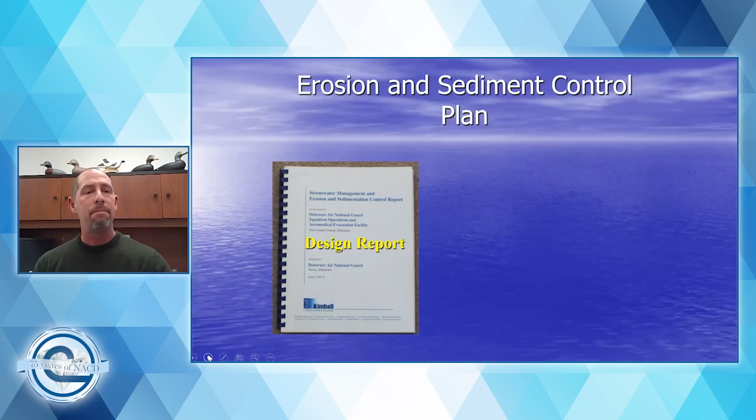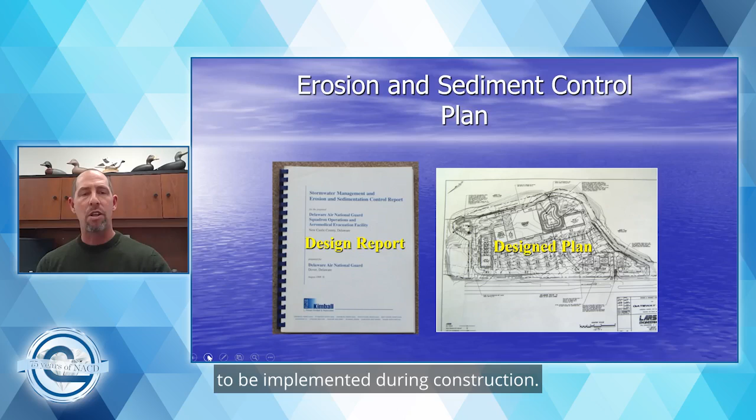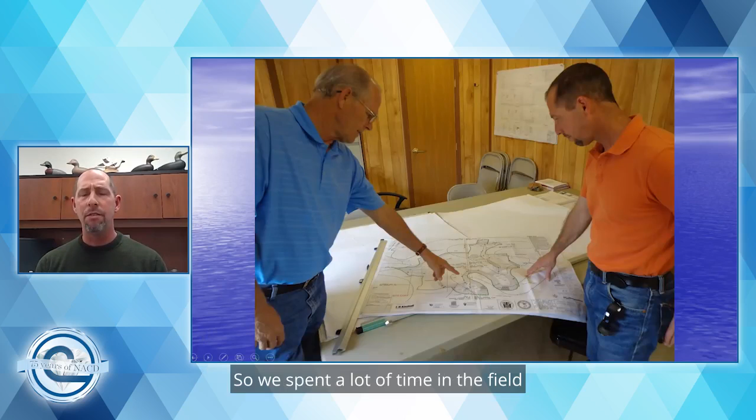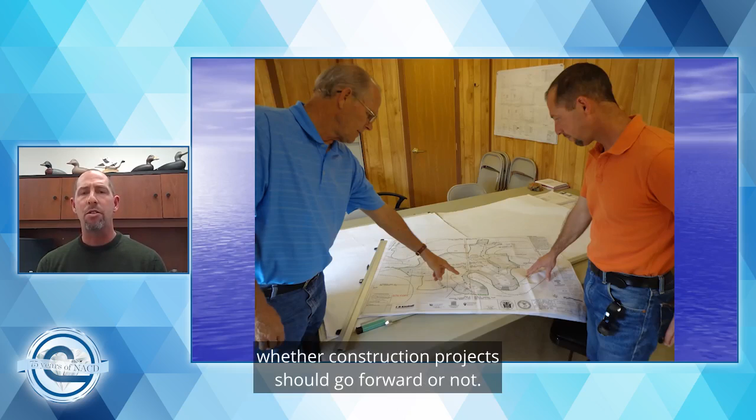And then we have our actual soil erosion plan, which will indicate the measures to be implemented during construction. This is a prior presentation I put together showing something of a virtual inspection. So we spend a lot of time in the field meeting with the responsible parties on site, discussing their projects. We're not a land use authority, so we don't get to determine whether a construction project should go forward or not. We just look to see that it's done in the most responsible fashion.

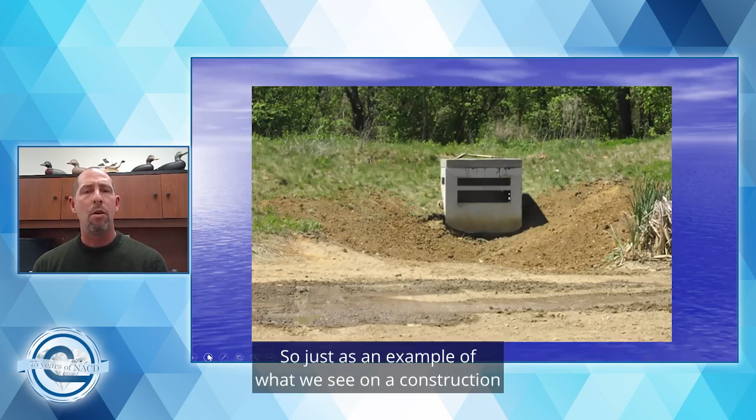As an example of what we see on the construction end, we will see these new structures placed early on in construction. We see them as they go in and during construction, so we know what we're looking for. Same thing with the riprap channel. If you have an idea how it started and you stumble upon something similar 15 years later, you can identify: is this working right or not? Is there an issue here?

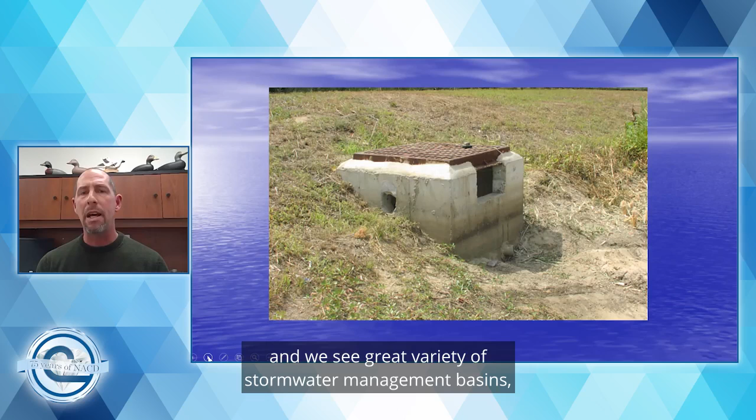Just another structure. So, we're on these job sites on a near daily basis, and we see a great variety of stormwater management basins, infiltration basins, retention basins, wet ponds, dry ponds, ponds with low flow channels, sediment basins. So we get to see quite a variety.

But our goal here is to reduce erosion through proper stabilization. Short term, we're looking to eliminate this or minimize this type of sedimentation during the construction. Long term, those basin outfalls, they can become an erosion problem that lasts for 5, 10, 15, 20 years. Once they're installed, very few people actually ever go back to take a look at them. And if there's a problem there, it's not going to be discovered without some sort of inspection.

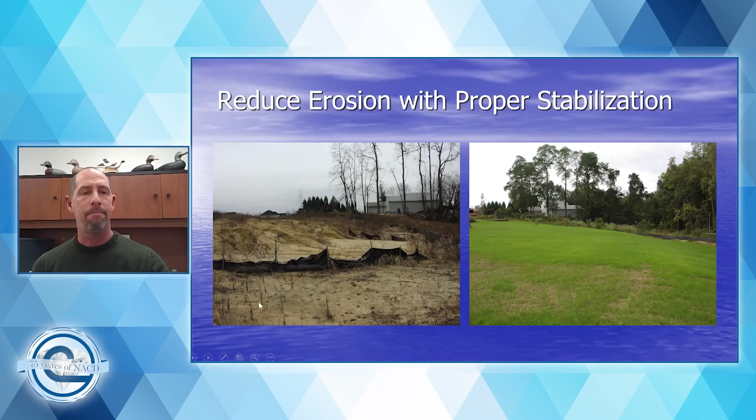So with all that being said, what is MS4? It's Municipal Separate Storm Sewer System, and that incorporates a municipality's storm sewer inlets, their basins, their culverts, any other kind of outfalls, and any other stormwater conveyance, roadside ditches, that sort of thing. The NPDES permit program, created in 1972 under the EPA's Clean Water Act, was put together to help address water pollution by regulating point sources as they discharge pollutants to the waters of the United States.

Many states receive a status of delegated, which assigns their compliance responsibility to the state. Probably 2/3 of the states in the nation have this current delegated status. In New Jersey, this delegated responsibility rests with the New Jersey Department of Environmental Protection. So the municipalities in the state are required to have a stormwater management plan and a stormwater ordinance, and file an annual report with the state of New Jersey to verify that their MS4 is in compliance.

Some examples of MS4 compliance requirements are to ensure that there's adequate post-construction operation and maintenance of stormwater management facilities owned or operated by the municipality. In New Jersey, some municipalities will take ownership of stormwater basins after construction has been completed. And in other cases, those stormwater basins remain the responsibility of a homeowners association, and in some cases, actually the responsibility of the property to which the basin is attached. So that might be just one homeowner, might be charged ultimately with maintaining the basin for the entire subdivision.

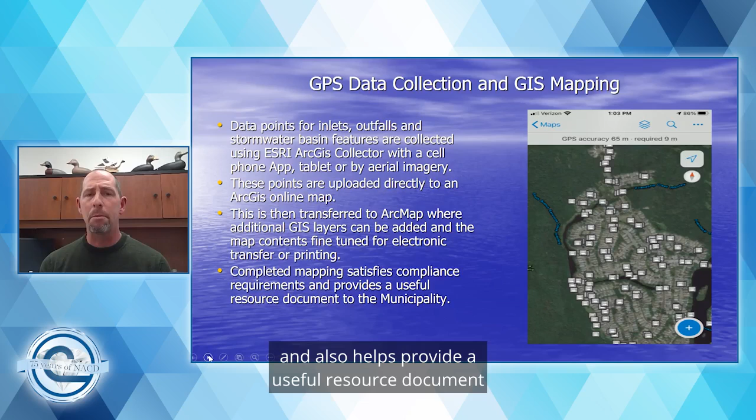So the data points for inlets, outfalls, and stormwater basin features are collected using an Esri ArcGIS Collector with a cell phone. Typically, I'll carry a cell phone, but it can be done with a tablet. And in some cases, you can collect the points via aerial imagery. These points are then uploaded directly to an ArcGIS Online map and then transferred to ArcMap, where additional GIS layers such as streams, streets, that sort of thing can be added, and then the maps are fine-tuned for electronic transfer or printing. Completed mapping satisfies the compliance requirements and also helps provide a useful resource document to the municipality.

So our basin inspection program actually kicked off before we were ready to go with GPS and GIS, because we already had the inspection component. We began inspecting stormwater management facilities through these shared services agreements in 2018 and carried into 2019 and 2020. So in 2019, we inspected upwards of 500 basins. This year, we inspected about 250 basins, but we also provided mapping services to a couple of townships. Some of those maps included up to 1,000 points.

So these agreements have provided an additional revenue stream, which is helpful. We have to be, like I said, a little bit entrepreneurial, so we have to look for other ways that we can maintain our finances. We also identified deficiencies that can be corrected and provide for improved stormwater management and water quality. As part of our program, we're providing an inspection report to the township or to the individual private entity that requested the inspection so that they can move forward with correcting any of the deficiencies that were identified.

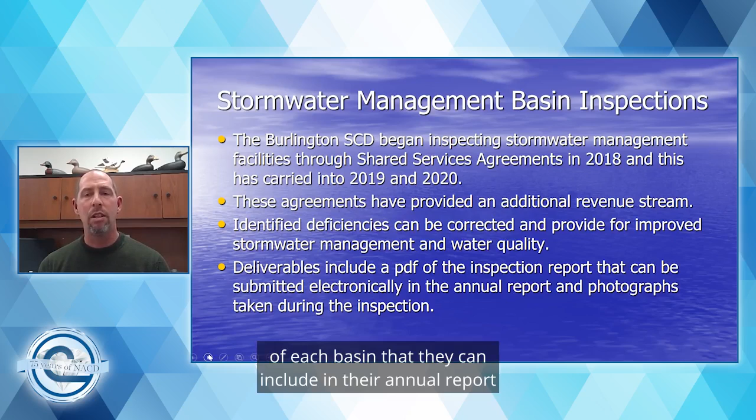During my inspections, I will generally carry a shovel with me, which helps me maintain balance in some of the wetter, more naturalized basins. But if I come across a clogged outflow structure that can be easily cleared because there's a red cup in there or a bottle, I'm happy to do so, and that gets the basin functioning the way it should. Our deliverables also include a PDF of the inspection report and generally 5 to 10 photographs of each basin that they can include in their annual report and use for their own purposes.

So this is an actual copy of our inspection report. Now this I keep on a tablet, but I don't carry the tablet with me into the basins, as I'm generally having to get through some rougher terrain. There's a lot of brush in some cases. Some of these basins are naturalized to the extent that the trees in there are 20 inches in diameter or so, with a lot of briars and brush that get in the way. So I don't generally carry this on me, but I do carry the cell phone for taking a lot of photographs. So it helps with my observations.

So we're looking at pre-treatments. We're looking to determine, is there standing water, floatables, emergent vegetation, which could be a sign that something is not working properly. Obviously, erosion, channelization. We're looking for animal burrows that might be weakening the basin berm. Sinkholes, low flow channels that are damaged or need cleaning. Basin liners, aerators in your wet ponds to see if they're functioning. We're looking at the vegetative stabilization for the basin bottom and the basin side slopes.

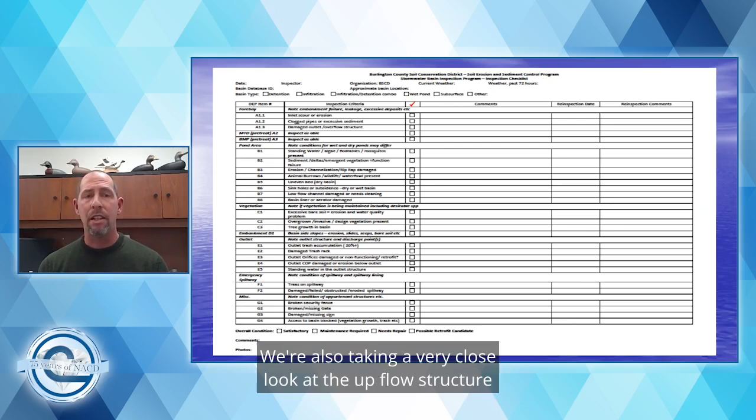We're going to observe and record here what type of vegetation is in the basin. Are there trees in the basin? Should there be trees in the basin? Was that part of the design? We're also taking a very close look at the outflow structure or the outlet structure to see if there's a trash rack, to see if there's any damage to the structure, to see if there's water standing in the structure, see if it's blocked.

We are also looking at the spillway, the emergency spillway, which is a typical part of most embankment basins, to see if that's obstructed or damaged. And in some cases, many basins will have fences to keep out people. So we're looking to see if those fences are damaged. Are there gates? Is there damage to the gate? So we're looking at all of those facets, and then anything else that stands out to us.

And at the very bottom, we will identify whether the basin is satisfactory, whether there's maintenance required, whether there's some needed repair, and if it's a possible retrofit. And we attach our comments and our photographs.

Okay, Eric, so at this point, I'm going to look to try to splice in that virtual inspection.

All right, so this is a little video I put together using a staff person's drone here at the district, just to kind of provide some idea of what a typical basin inspection would look like. We did this recently, so there is some snow on the ground, but we start doing inspections once the agreements are signed, and sometimes that is as early as March. Some townships wait a little bit, and we don't get started till almost September, which really shortens our timeline.

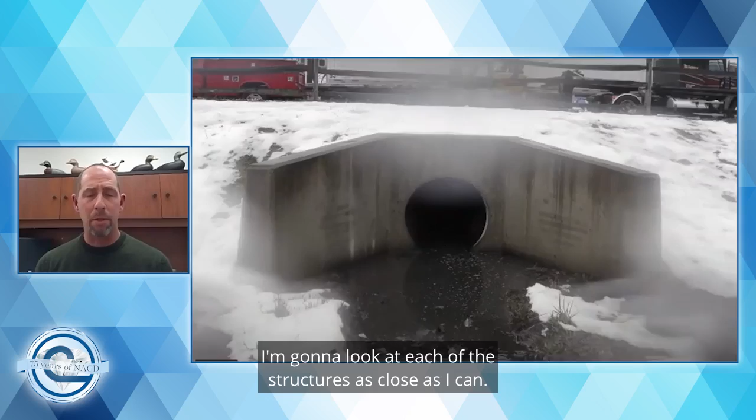So first thing I'm doing is I'm entering the basin. If there's a fence, that's what I'm doing. I'm going through the fence and the gate, and I'm going to take pictures of each of the structures. I'm going to look at each of the structures as close as I can. Here you see some floatables that have come out of the basin outflow structure.

Now, this was an easy basin to navigate because it's relatively flat. There's no vegetation. There's nothing I really have to get through. I do have boots on in case I get in a wetter area. So I just make my way from structure to structure, kind of making some mental notes along the way, taking photographs of anything that stands out. So I'm walking over to this basin inflow structure over on this side of the basin.

In some cases, you'll see obstructions in there. There could be a grate that's holding in leaves, and that holds water in the pipe, perhaps under the parking lot. In this case, that's not there. So that's relatively unobstructed. Now we're going to go over and take a look at the emergency spillway.

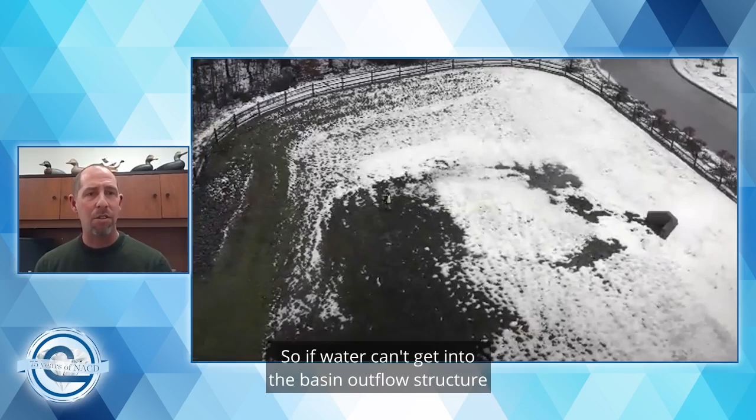So if water can't get into the basin outflow structure, or there's a larger storm event, basins are typically equipped with an emergency spillway, and that spillway needs to be kept clear so that water can flow unimpeded through and over it. So in this case, that's the gray material. It's riprap. It's usually larger rock. All emergency spillways are not stabilized or armored in that fashion, but they can be. And that's the downstream area. That emergency spillway is in pretty good shape.

No obstructions were noted. And along the way here, if we're being engaged by the township to take our GPS points, I'm actually stopping to identify the location of the basin, grab my points for that using my cell phone. Also the basin outflow structure, which I'm walking toward now. There I am still walking to it.

So there's a trash rack in front of that basin outflow structure. That's the angled metal there on the front. Looks like a grate. And it's very common for plastic bags, leaves, whatever it might be, to kind of get pressed up against those trash racks by the force of the water trying to leave the basin. So it's very key to make sure they're inspected and maintained and kept free.

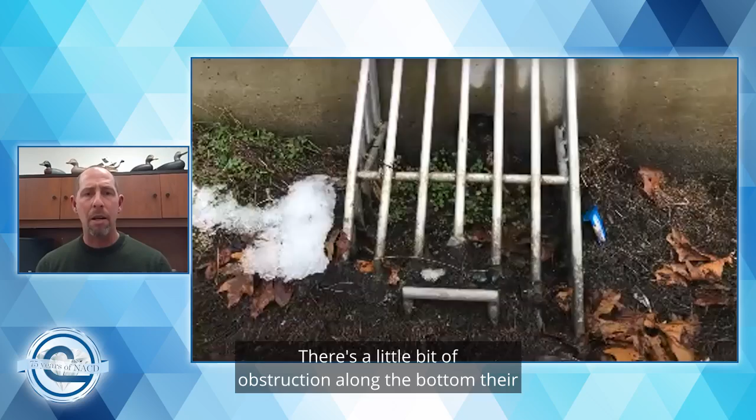There's a little bit of obstruction along the bottom there, not terrible. But if I needed to, I can grab my GPS point while I'm there. So where that's focusing now is the basin outfall area. So now I'm going to leave the basin itself and walk around to get to the basin outfall to make sure that there's no erosion at the basin outfall.

But again, this was an easier one to reach. I tried to find something that would hopefully provide a good, clear example without a lot of brush in the way. And here again, I'm going to take a look at the basin outfall structure to see if there's any impediments at the outfall structure. Sometimes trees will grow up right in front of the pipe, which can artificially hold water back in the basin. And we're going to see a photo of that shortly.

So, as you can see, there is some vegetation growing over it. It's not yet obstructing it, but it is something to be mindful of if you're the owner of that basin. You know, this is a privately owned facility, but we were doing the inspection for the municipality. Some municipalities will pass along a cost to those privately owned basins, and some will take it upon themselves to see that the inspection is done the way they would like to have it done. I'm just grabbing a couple more photos of the downstream area, to document that there's no erosion there.

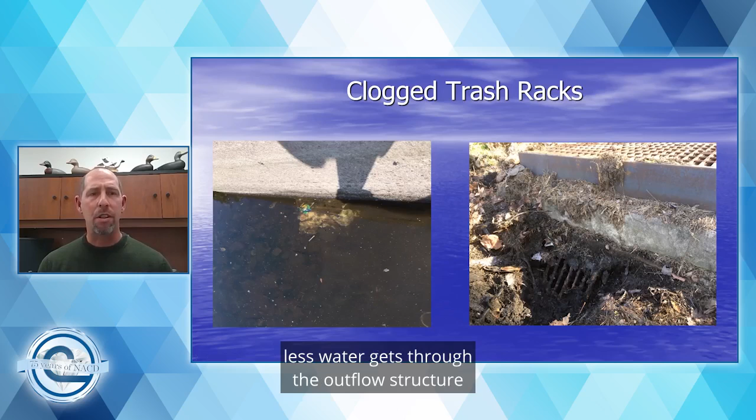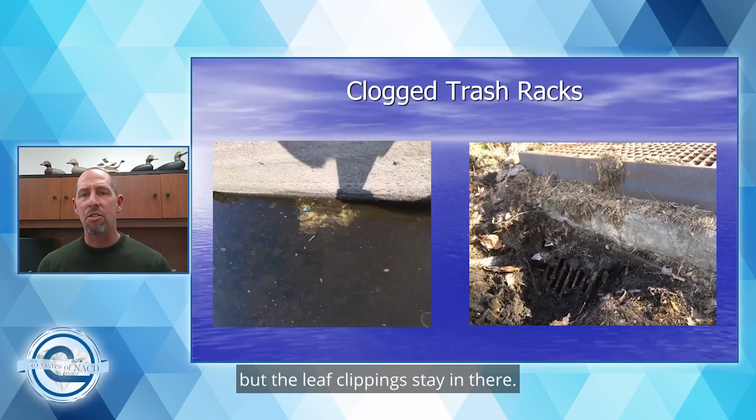This is a different structure here on the right-hand side where I've tried to clear back some of the material. Most of this is organic based. Leaf clippings, that's a big thing. Most of these basins, they get mowed, but the leaf clippings stay in there. Rain comes, they lift up, they float to the basin outflow structure, and now they're clogging up the structure and holding water in the basin.

Same with the leaves. But you can see over on the top here, this is the grate. That grate is open, so the basin will pass stormwater, but not as it's intended to. So it is somewhat impaired.

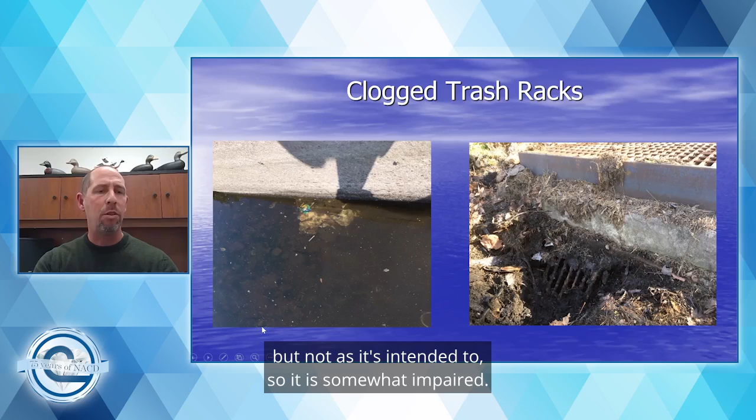Just some more examples of clogged trash racks. Great intentions with these trash racks. And I think there's a real opportunity if someone can come up with a trash rack that does not result in some clogging. This basin here, see, that's basically all algae and vegetative material that's just pressed up against the trash rack. Water level goes down, it dies off, and it's almost like plastic.

Same as over here on the right-hand side. Very little water is passing through that, and you can just see all the algae that's kind of sitting in there, and that's what's really causing a lot of the issue.

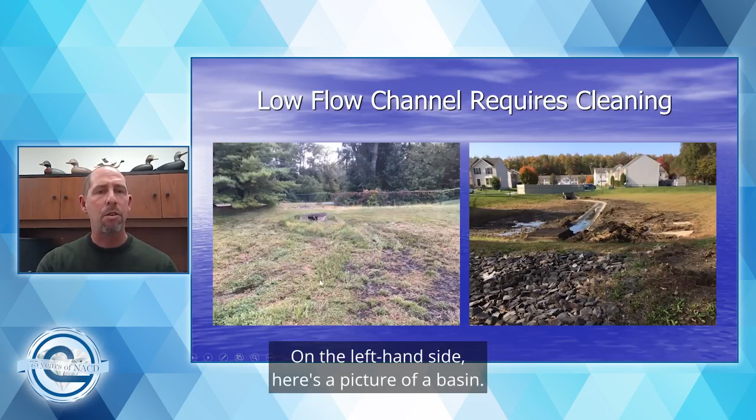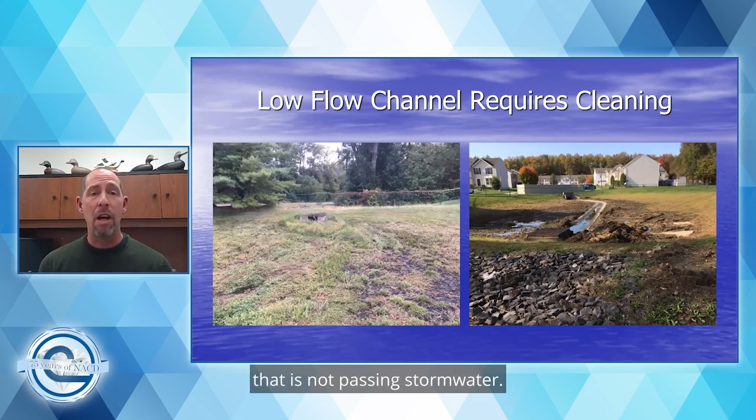Low flow channels that require cleaning. On the left-hand side, here's a picture of a basin. Here's the outflow structure at the very end where that rectangle is. No evidence of a low flow channel. But if you look a little closer at the structure, and if you look at the structure from the inside, so you're standing on top of it, looking into the grate, typically what I will see is an opening in the bottom that is not passing stormwater. That's an indication that there's a clog, also an indication that there could be a low flow channel.

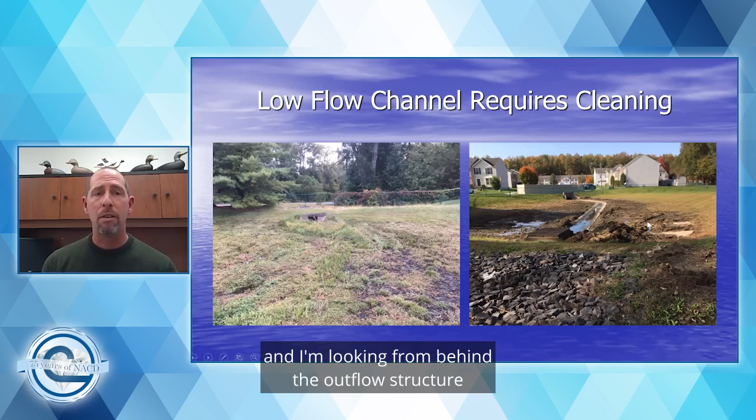So on the right-hand side, you see that same basin, and I'm looking from behind the outflow structure back into the basin after some cleaning has taken place, and you can see the low flow channel is now observable. And eventually, when this work is done, it will pass stormwater much more efficiently. You also see in the foreground that the basin has an emergency spillway.

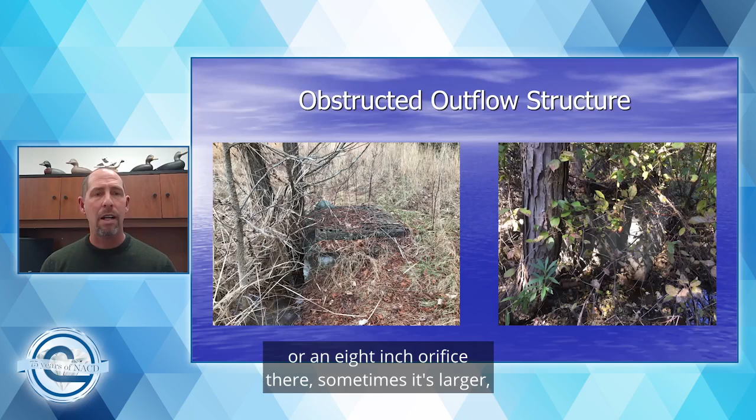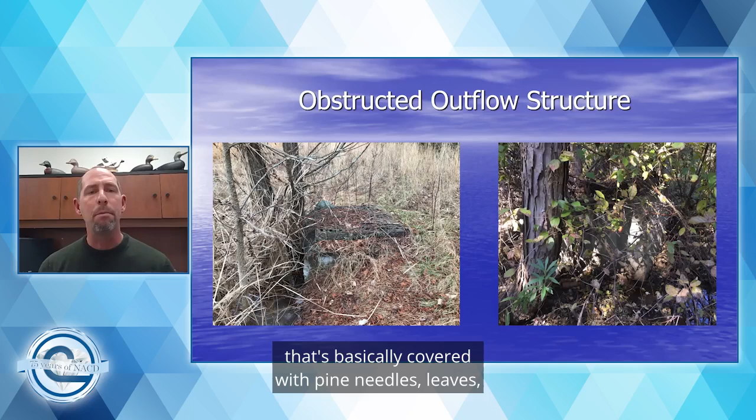So, obstructed outflow structures. So this is how water actually leaves the basin. And on the left-hand side, you can see that there's trees actually pressed up right against the outflow structure. So typically there's a 3 or 5 or an 8-inch orifice there. Sometimes it's larger, but very little water is going to pass through that, given that there's a tree there. Also, you'll see on top there's an inlet grate that's basically covered with pine needles, leaves, tree branches, that sort of thing.

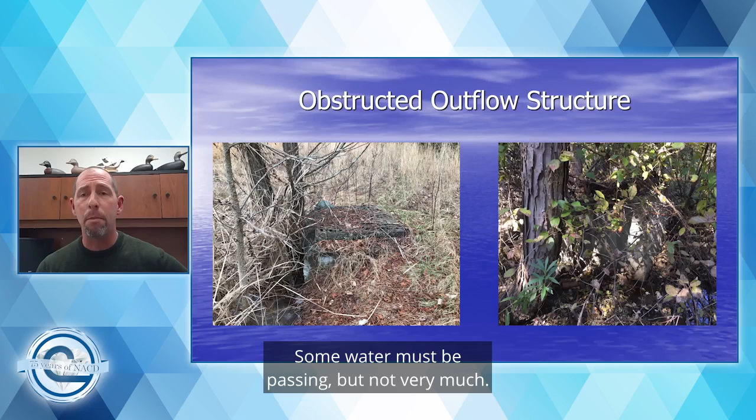Over here, just an example of the size of trees that will grow in some of these older basins. There's a tree here. I never could get in front of that outflow structure just because of all the obstructions. Some water must be passing, but not very much. And on top, it's almost completely obstructed by other vegetation.

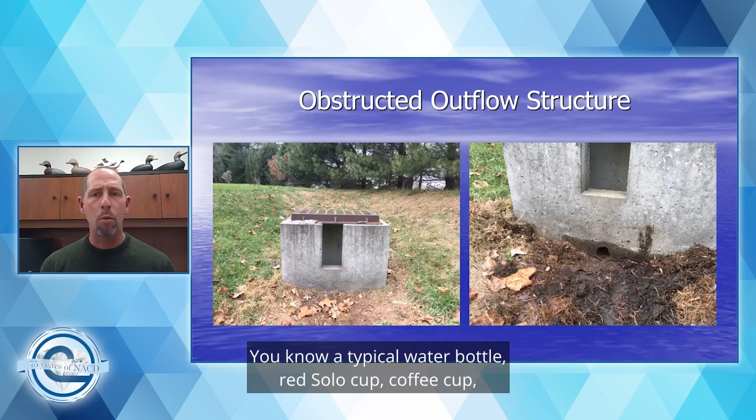So just say a typical outflow structure that could be obstructed. On the left-hand side, you may not actually think that there might be something there, but if you look inside the box structure, you'll see that hole from the inside. Just a little bit of shovel work, and now you can see that. And it doesn't take very much to clog that. A typical water bottle, red Solo cup, coffee cup, that's going to clog up, a couple leaves, a branch. Doesn't take very much. And then once that's clogged, the basin will go downhill from there relatively quickly.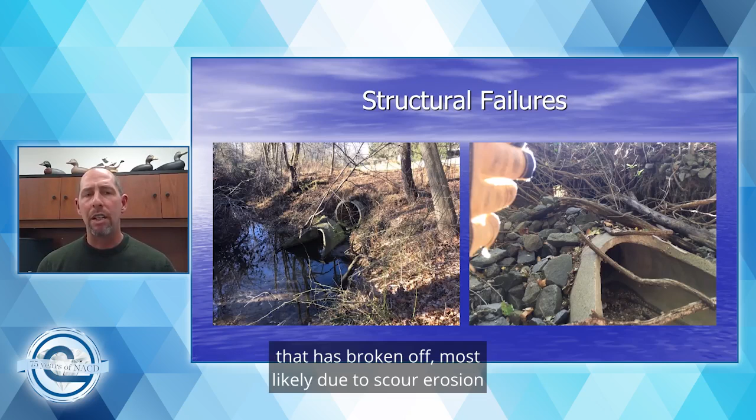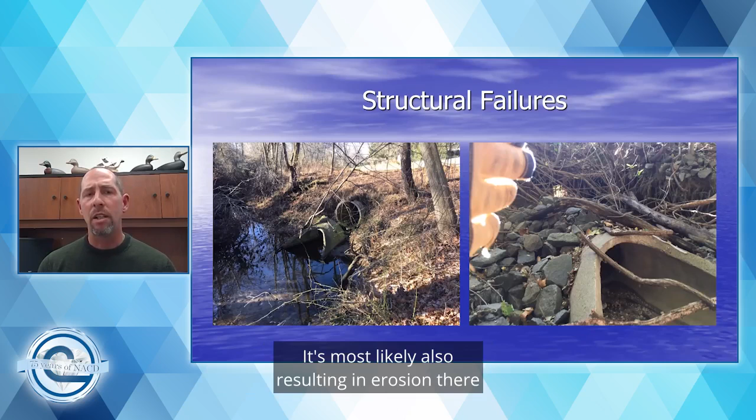Structural failures. Don't see as many of these. Over on the left, you can see the pipe that came out of this structure. And this is the actual flared end section that has broken off, most likely due to scour erosion below that flared end section. So it's actually dropped off into the waterway there. So it's impounding water in the waterway. It's most likely also resulting in erosion there, because now the elevation of the pipe, which is discharging water, is so much higher than the water surface itself.

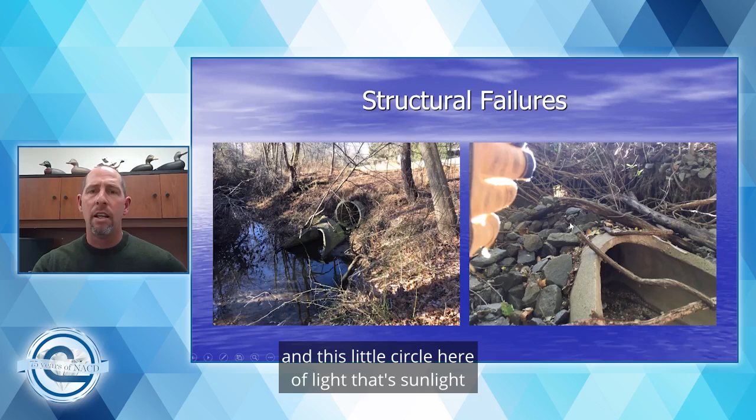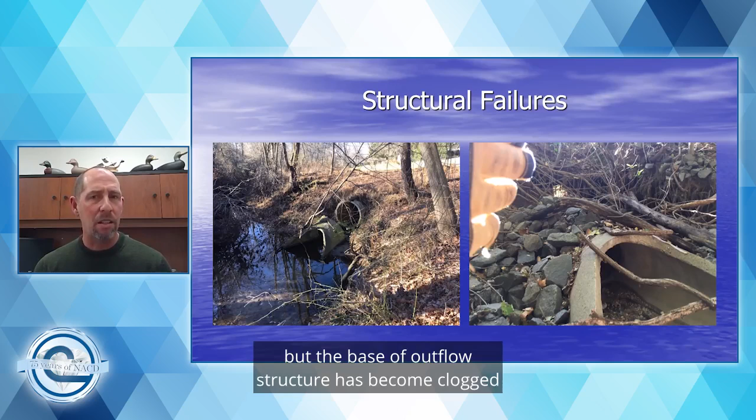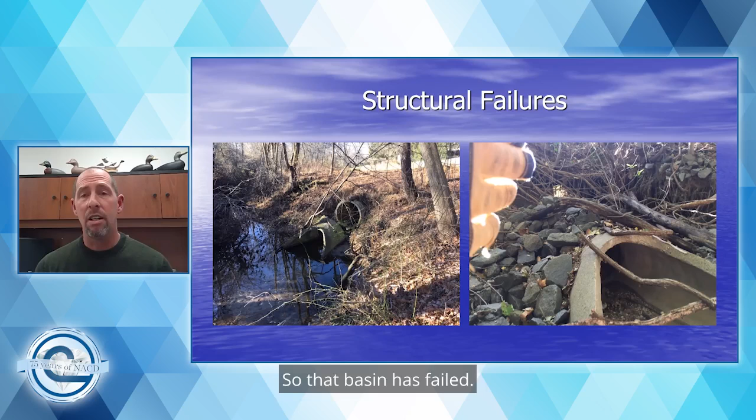On the right-hand side, you see there's a flared end section here, and this little circle here of light, that's sunlight that you can see through the berm of the basin. On the other side of that hole is the basin outflow structure, but the basin outflow structure has become clogged, and so water has been moving laterally along that pipework and exiting the basin without any kind of stormwater attenuation, which is when water kind of holds in the basin. So that basin is failed. It's not holding stormwater, it's not functioning the way it's designed, and it's a real example of what could happen next, which is a complete blowout of the basin berm.

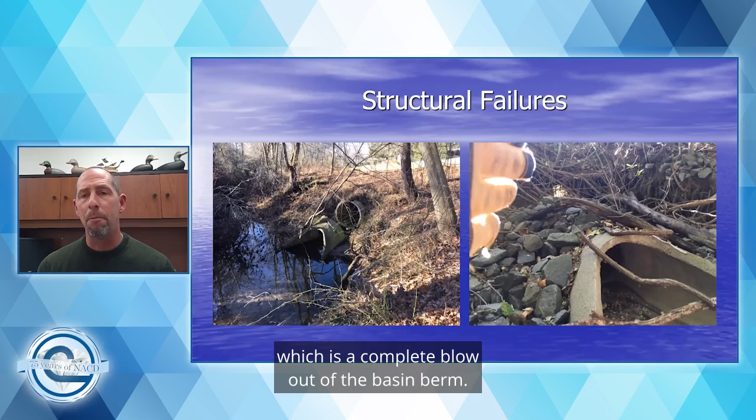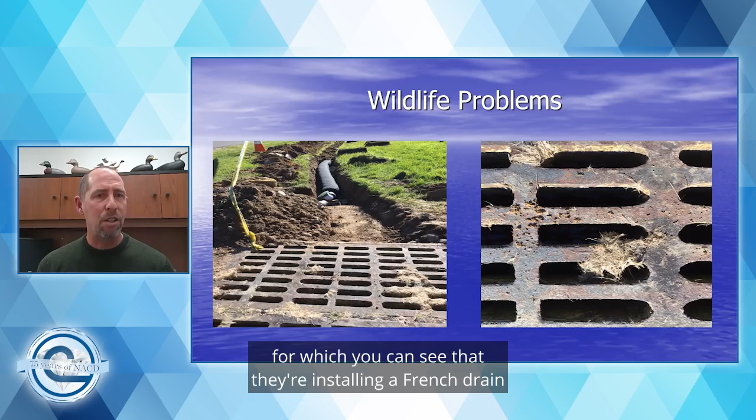Just upstream of this basin, say 20 yards, is this inlet. That inlet takes stormwater from the backyard of an apartment building, where you can see that they're installing a French drain, probably because they have water around the foundation. There's too much water around that location. What you can't see here is that there's already standing water in that inlet, and that's because that basin, which I just showed you, is full of water. It's holding about 5 extra feet of stormwater. So if there's nowhere for that water to go, it's going to sit in that inlet. It's going to sit in the ground. It's going to really cause wet conditions, which is not good for structures.

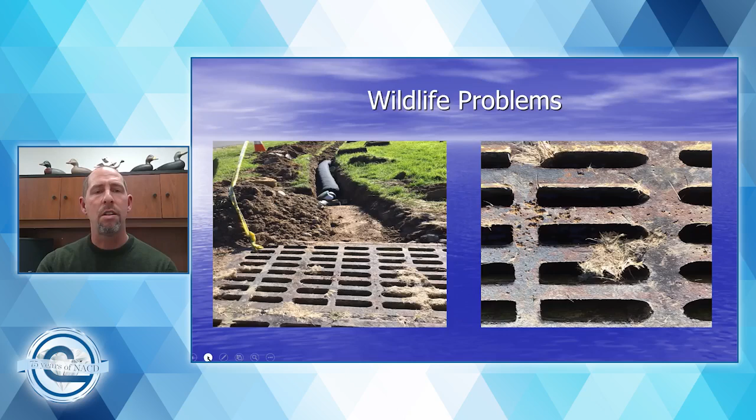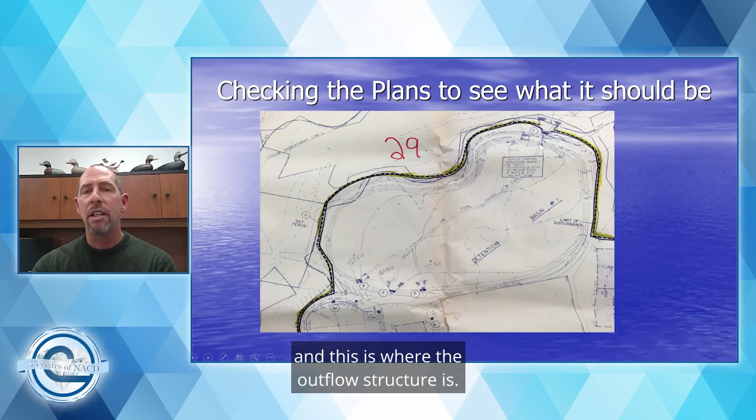You can also hopefully see that there's a low flow channel, concrete low flow channel. And over here, there's a spillway. And this is where the outflow structure is. And the details indicate that the outflow structure should have an orifice much lower than where the standing water is.

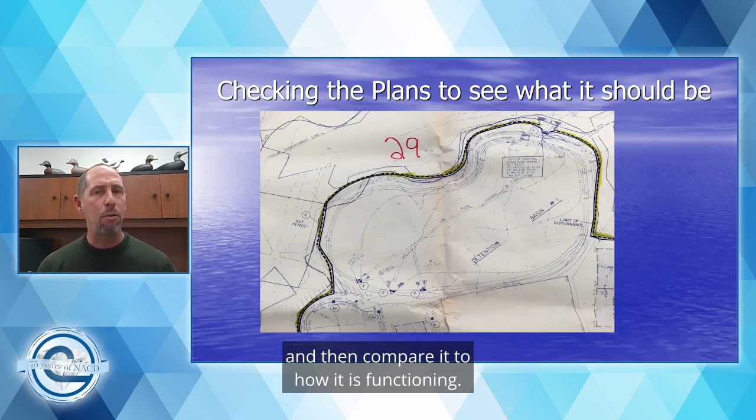So where I have real questions on how the basin is supposed to function, we can in many instances find the original drawings, discern from that how they're supposed to function, and then compare it to how it is functioning. It becomes a very useful tool in our inspections.

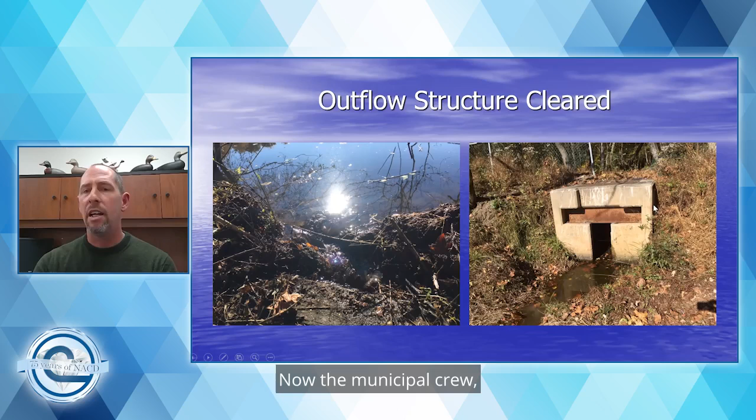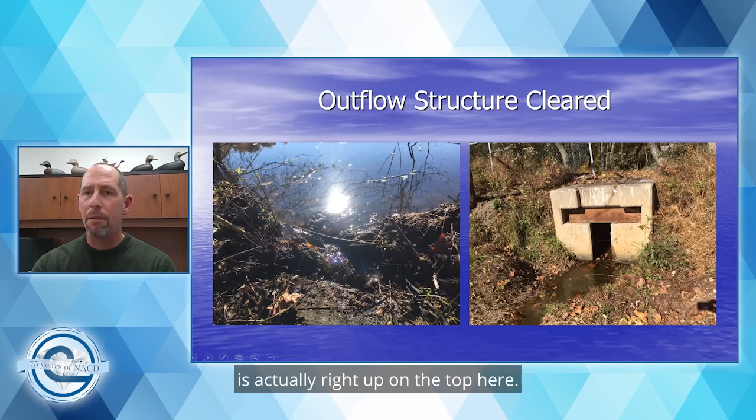So right up here, I cleared back just a little bit, so the water would get into the inlet. Now the municipal crews, so this is a municipally owned basin, they went out and did a more thorough job of trying to clear back those obstructions. And that's what that structure actually looks like. So this over here on the left, this top of the grate is actually right up on the top here. All of this down here was obstructed.

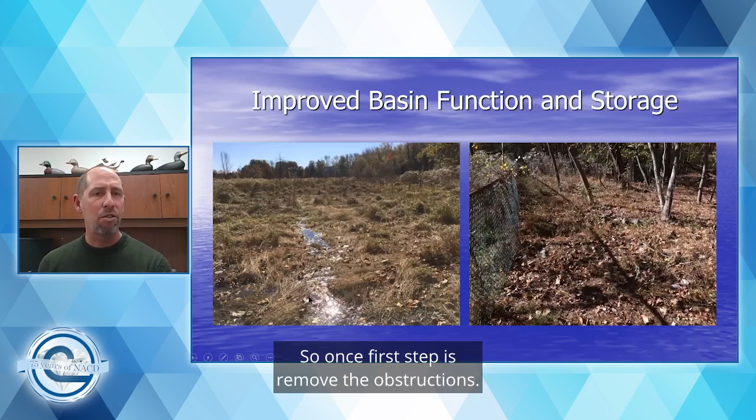So the first step is to remove the obstructions. On the left here, now you can kind of see the size of the basin. Now the basin actually has some storage to hold stormwater, as opposed to previously there was no storage and it was just rainfall in, water goes over the emergency spillway. This is the emergency spillway over here, and you might be able to see that there's some damage there where it had begun to erode.

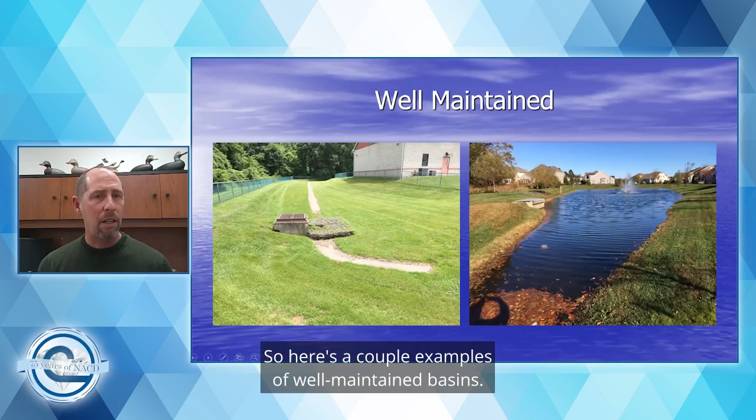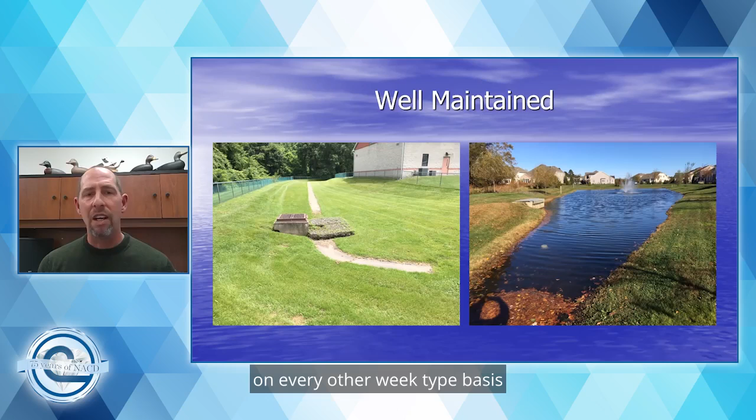So here's a couple examples of well-maintained basins. Again, basins don't have to be manicured, but it's not uncommon for certain basins to get mowed on an every other week type basis, although they don't have to be mowed much more frequently than a couple times a year.

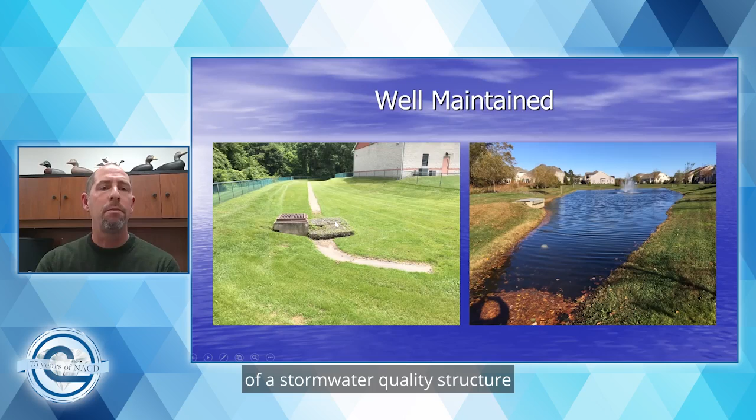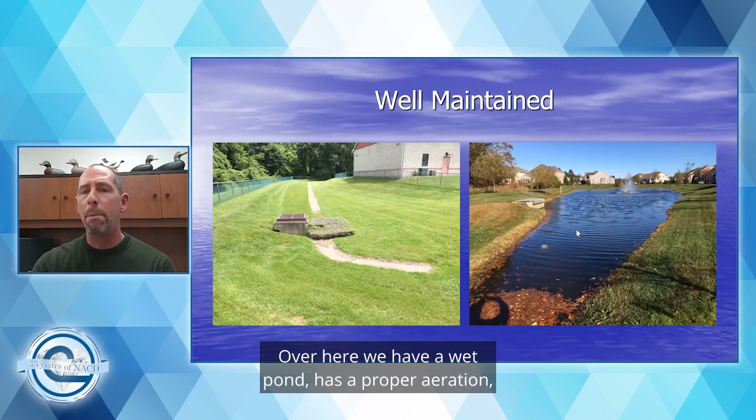This basin here has a little bit of a stormwater quality structure in front of the basin outflow structure, just to kind of settle out some of the fines. Over here, we have a wet pond, has proper aeration, good stabilization around it. Both of these basins are well stabilized, well maintained, functioning properly.

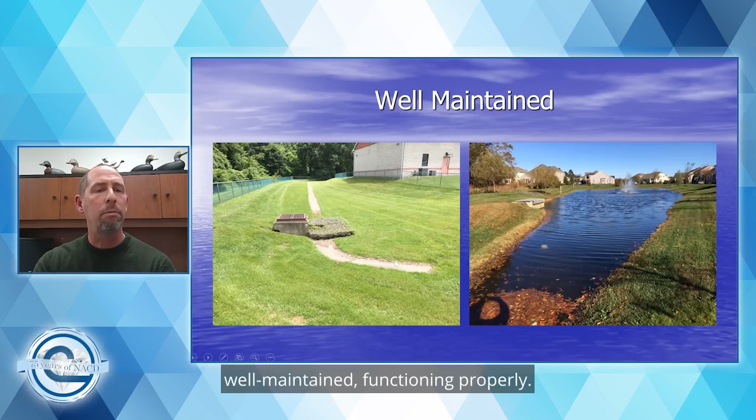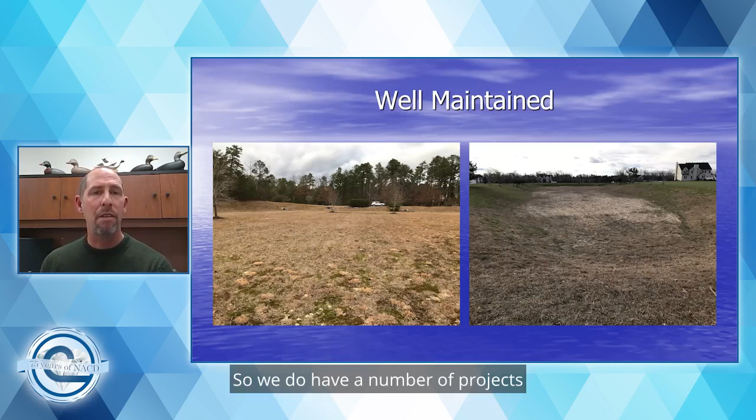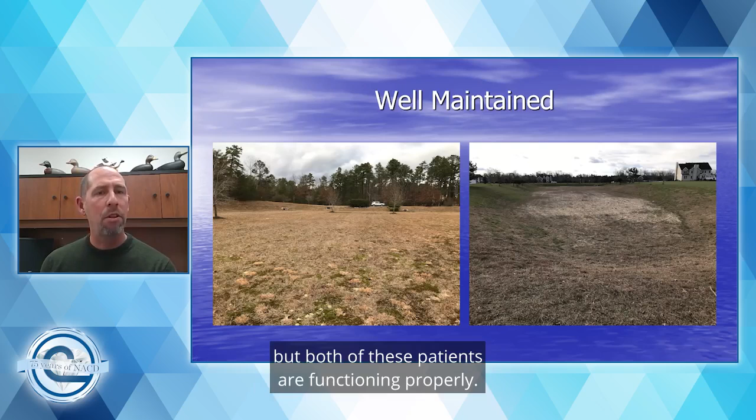A couple more examples. Now, I may not have mentioned it, but we're located near the Pinelands National Preserve in New Jersey. So we do have a number of projects that are actually built in that area. These basins were. And you just see it's a different type of vegetation, less vegetation in some cases, as on the right-hand side here. Typically, we'll have a sand bottom to promote better infiltration. But both of these basins are functioning properly. They're not supposed to hold water, and they're not.

So just to recap, we're using staff expertise to offer our MS4 compliance assistance to municipalities at a reasonable cost. This is providing additional revenue to the district, and we are saving the municipalities the cost of hiring additional employees or diverting existing employees or seeking more expensive alternatives such as a private engineering firm.